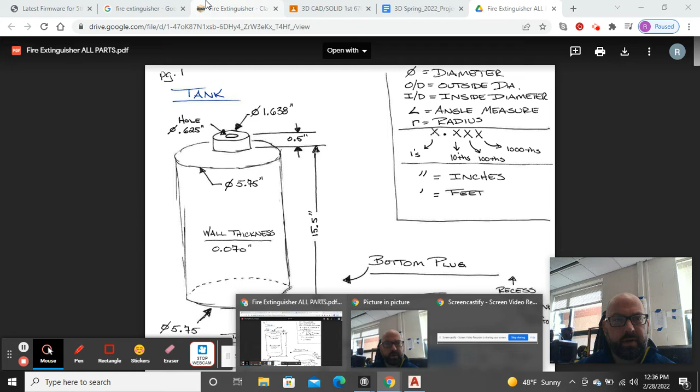Hello, this is going to be the first video of a multi-video series on modeling a 3D fire extinguisher. And the reason that this is getting modeled is it's just something that's in my room and in my classes.

For some reason, 9 has become the magic number, and anything that the kids are part modeling, and like trying to work to improve new 3D skills or whatever, I always say there's got to be a minimum of 9 unique parts. And sometimes I'll have students do 40, but that really prevents getting too few parts where there's just not enough rigor for the project.

So, in later videos, I will share a photo of the one that I'm drawing, so you can see some clearer pictures. But this is basically it. And the part that I'll draw first is going to be this tank, and where I'm pointing at with my little mouse hand right here is this curved portion of the tank.

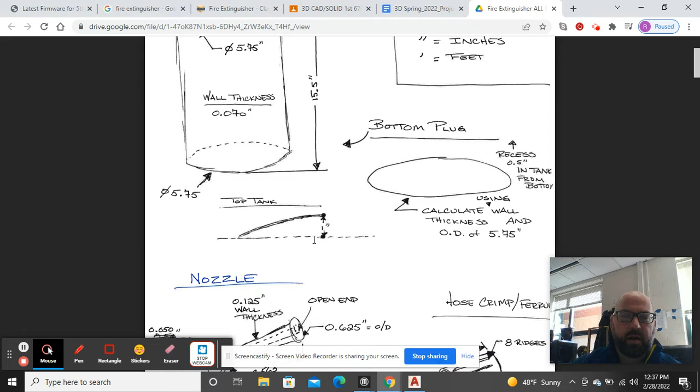And so on this project, I've created a whole series of drawings for the students, and they look like this. Part of this is so students can apply. I will have students do it on their own from time to time, but this is so that they can apply use of multi-views and perspective drawings, and measurement, dimensioning, those types of things.

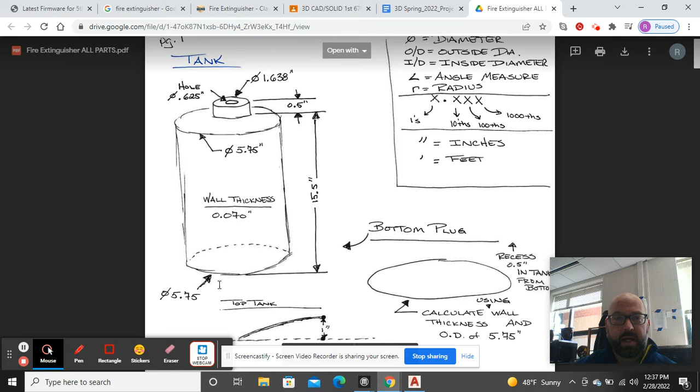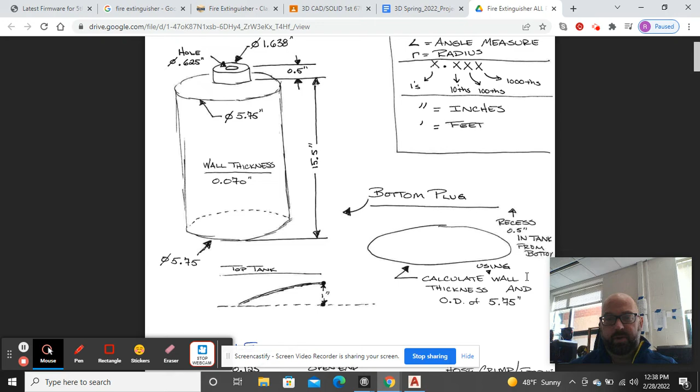Okay. So what I'm going to do is I'm going to snip a part of this right here and use this information to draw the tank. I might make the tank into 2 videos, but the first part of it's very easy, and it's just a cylinder. Okay. Where's my zoom? I like to zoom out of this a little bit, but so I'm going to go Windows button Shift letter S to snip this, and I'm going to go ahead and pop this in my AutoCAD drawing,

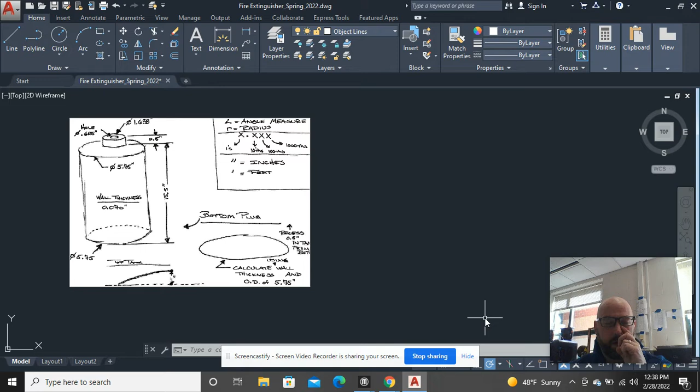and that'll be my starting point. I only put these so that it's real easy to do this if you're working in a 2-dimensional space, and I can do the bulk of this in 2 dimensions. Okay, for my students, I keep telling them, the higher percentage of things you can do in 2 dimensions, the quicker your 3-dimensional work is.

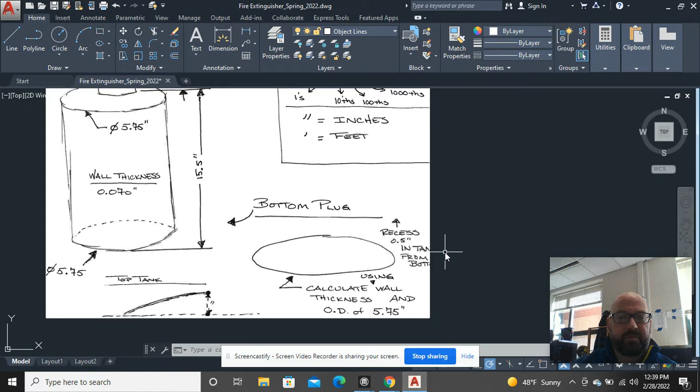Okay. So if I look at this, I see that I have a tank and it's got a diameter of 5.75, and then the wall thickness, or the thickness of the steel that this is actually made from, is 0.070 inches. This part, you might wonder, what is a bottom plug? It's just a plate. It's got the same thickness. And it says that it's recessed a 1/2 inch into the bottom of the tank.

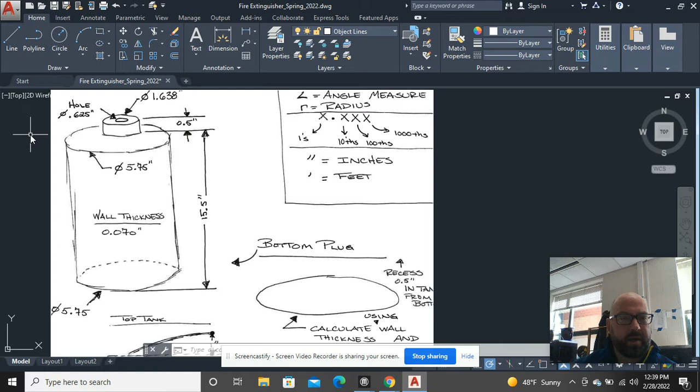Another thing to look at and note right here, if I look from the very bottom of the tank all the way up to the base of what I would call the neck, I know it's hard to see my mouse, but where that little spout is, it says over here it's 15.5 inches.

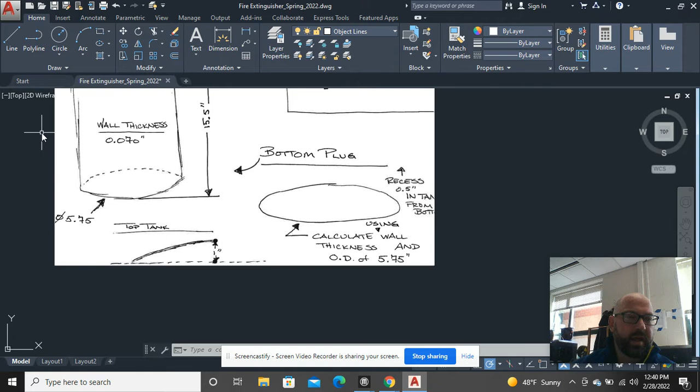Okay, but when I come down here, I showed a portion that's right above my mouse here, where it's showing a curve, and to get that dome-shaped portion, the height of that curve is 1 inch off of an imaginary baseline. So that measurement of 15.5 inches will actually get shorter. Okay, so what I'm going to do is start with a circle with the diameter of the tank.

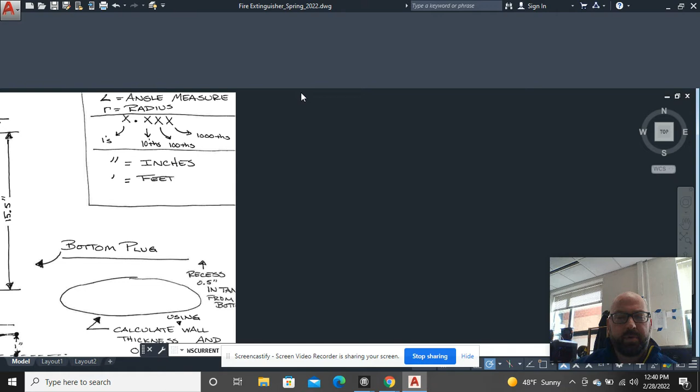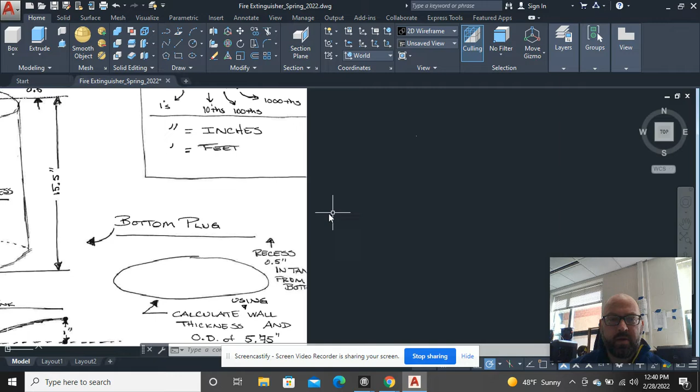If you haven't been in AutoCAD in a while, my ribbon is set up for 2 dimensions right now. So I'm going to go ahead and change it to a 3D modeling ribbon down here with the little settings wheel. And I'm going to start by just drawing a circle with a diameter of 5.75 inches. And who knows, where did that circle go? Is it here? Yep, that's it.

So this image that I brought in was way too big. So I'm going to go ahead and move this over to here. Get this a little bit closer. Still very large.

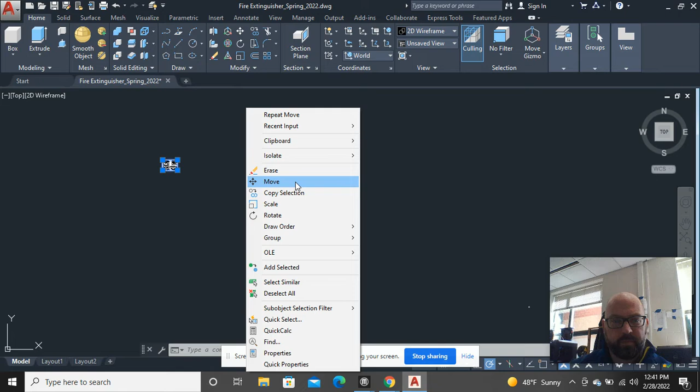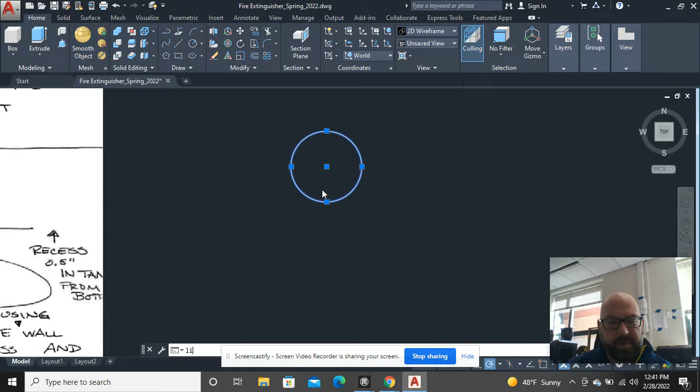Sorry about this. I should have double checked it. Still going to shrink this down quite a bit. There we go. That's a little bit better. Okay. And I'm just going to check this. LI spacebar is my shortcut for list. And for some reason that says, what is the diameter? Gives me a radius 2 7/8. So that is my circle.

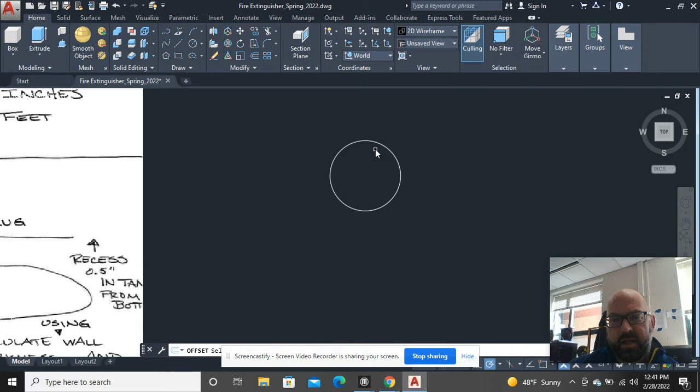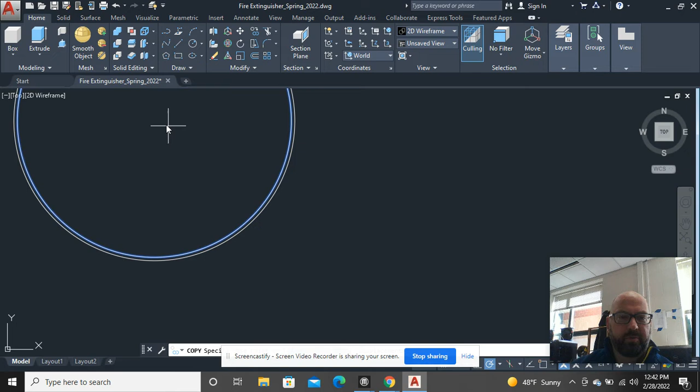Okay. Coming back here, I look at wall thickness and it says 0.070. So if I offset this 0.070 to the inside, click the outside of the tank, use the offset tool, type in 0.070. Now you can see I have a circle within a circle. And I'm still going to go ahead and make that a little smaller. That now can be used, I can steal this inner circle and use it for the plug or the metal plate that would be welded on the inside of the tank.

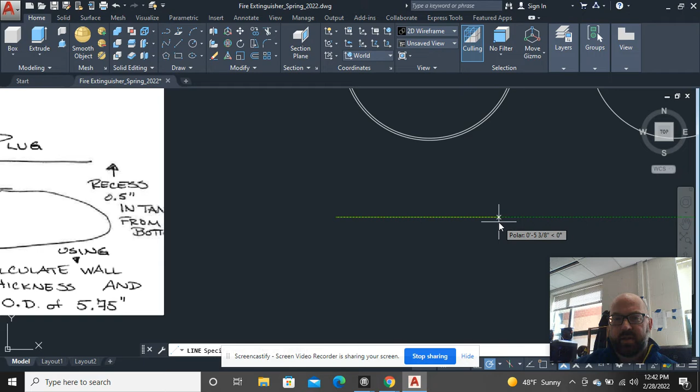Okay. The next thing I'm going to do is, while I'm here in a top view, I'm going to set myself up for drawing the top of the tank. And so the way I'm going to do that is I'm going to use a construction line. And I'm going to draw a horizontal line that is the same length as the outside diameter of the tank, which was 5.75.

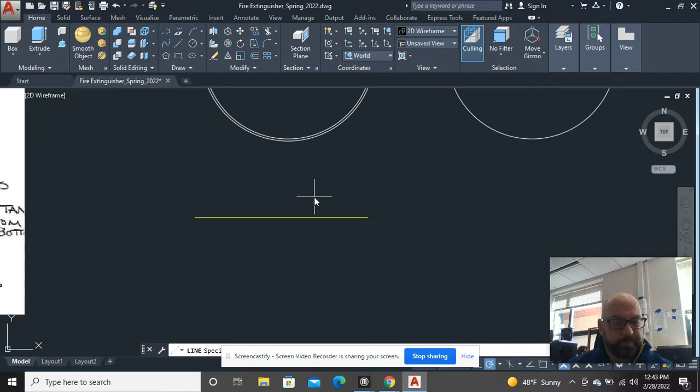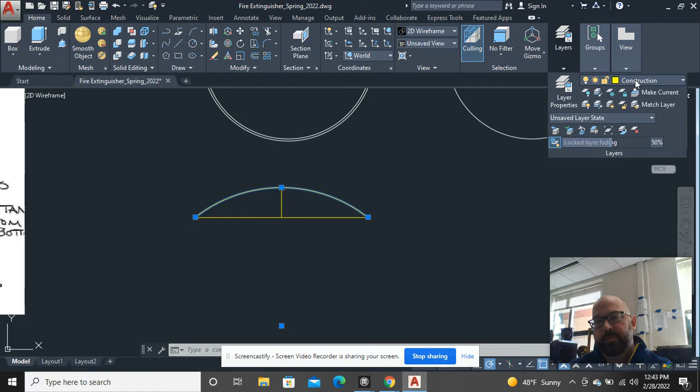Since I showed that the curvature from this imaginary dotted line to the very highest point of the tank was 1 inch, I can, apparently my object snaps are not on, I can just draw a vertical line 1 inch. At this point now I can just use an arc and click from there to there to there. That's not a part of the object, so I'm going to put that back on object lines or whatever I had drawn that on. There we go, object lines. Oops.

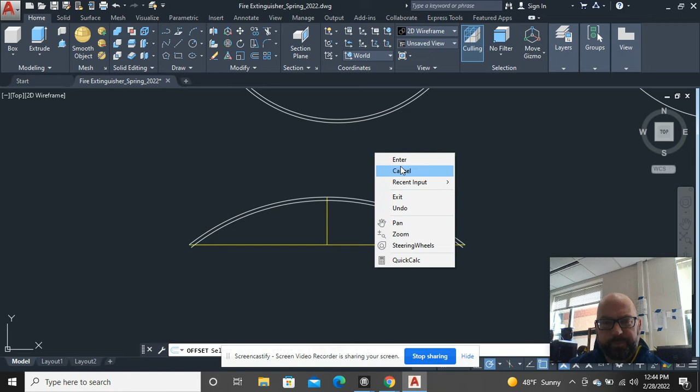There we go. And likewise, I'm going to offset this 0.70 inches. Oops, must have been 0.070. Offset 0.070. Excuse me. And there I go. Okay. I have to trim where this is overhanging. And then I'm going to also trim this entire right side. I don't need that at all. Okay.

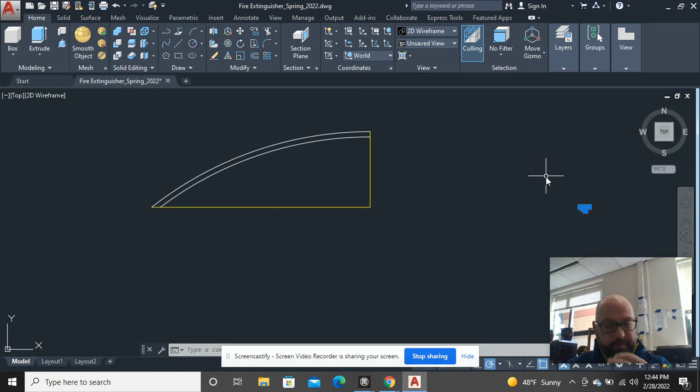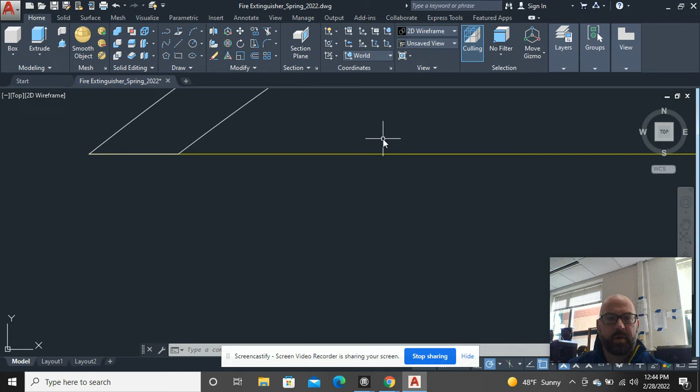At this point, I can draw a line from here. Oops, got to be on my other layer. Layers, object lines. I can draw a line from here to here. And then come in and draw one from here to here. Okay. This baseline is no longer necessary, but I am going to keep this line because it's handy for placement when I get down the road.

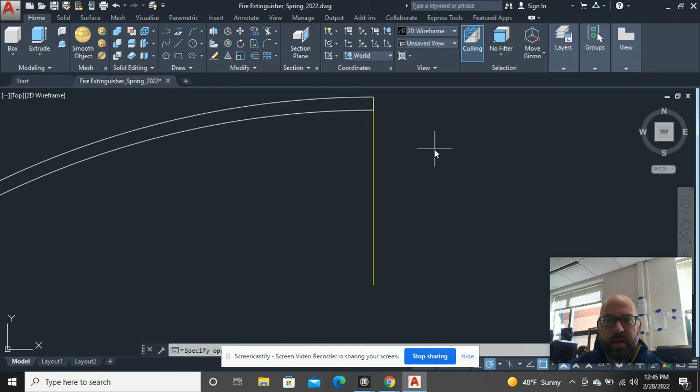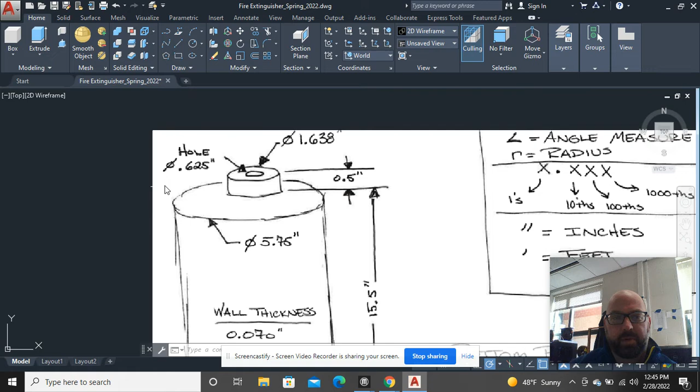The last thing I want to do in 2 dimensions here is join all of that stuff. Okay. And I am going to nudge my little stick, remembering that it was connected up to the very tippy top of this. So I'm going to nudge the stick because what I'm going to do in 3 dimensions now is revolve this. I suppose it's not a bad idea while I'm here in 2 dimensions to draw the neck on the bottle. Actually, I think I'll come back to that later on. So I'm going to delete this for right now.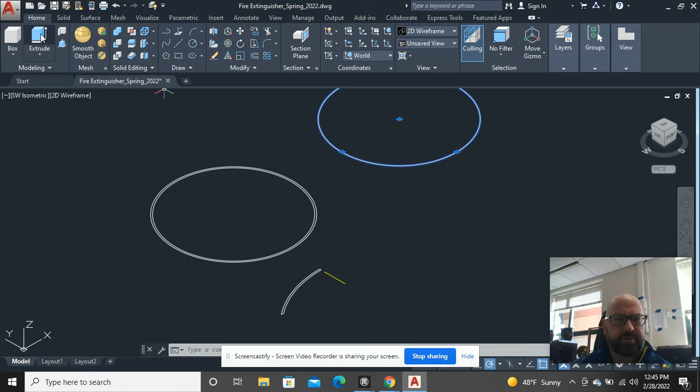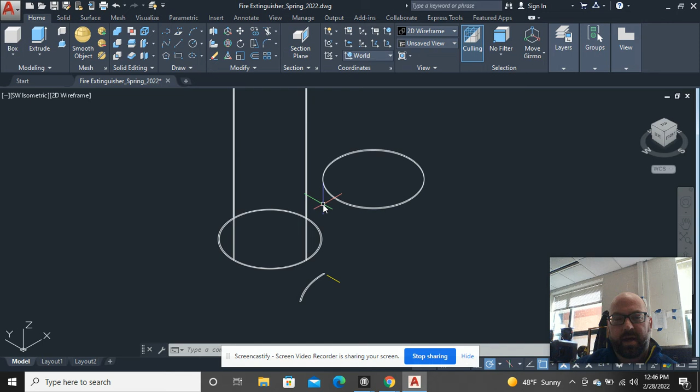And now I can go up to a southwest isometric view and get all my parts and pieces put together. So what I'm going to do is extrude this. And I want to make that extrusion 0.070. And that's the plug now, or the piece of plate that will be inserted into this tank. Okay. I want to make the height of this 14.5. And the reason for that was 15.5 was the distance all the way up to the top of what's going to be the curved portion.

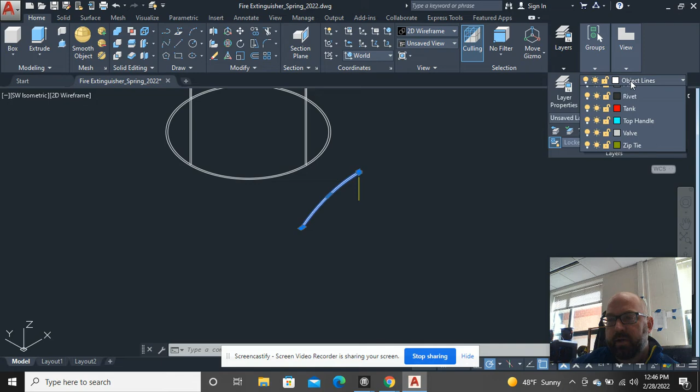Okay. I'm going to 3D rotate this part. 3D rotate, pick a base point. I'm going to go around the red ring or hoop, and I'm going to type in 90 degrees. Now I have this ready to roll. Okay. I've pre-done some layers which are on my website. And so what I'm going to do is put these on the appropriate layers.

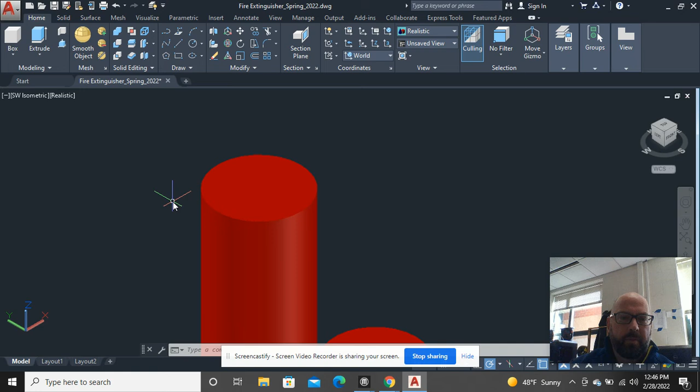Okay, and I'm going to start. So these are all solids now, at least two of them are. That's a solid and that's a solid. I want to subtract the inside of this out, so I'm going to go ahead and go subtract.

Pick the outside, right click, hover in, and I've got to get it till just the inside lights up, just that inner portion, which is sometimes difficult. I can't see that it did subtract it. So if you have difficulty with it, change from realistic to a 2D wireframe, and then go back to subtract.

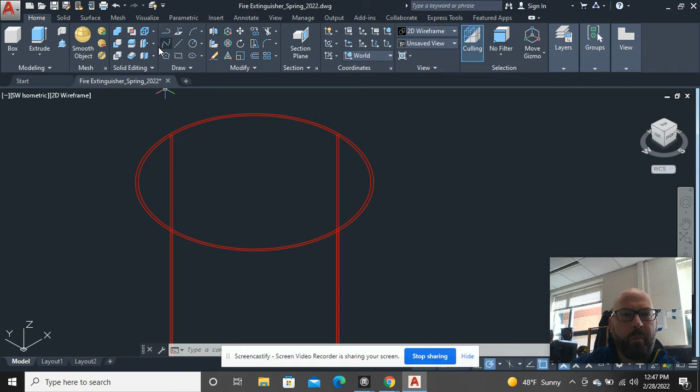Pick the outside. Always pick the bigger first, then right click, then pick the smaller, then right click again. It won't look as if anything has subtracted at all, at least when you're in realistic, okay?

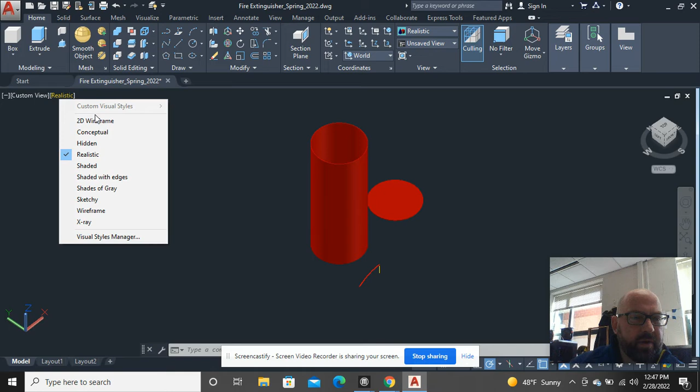In this case, I'm going to go back to a 2D wireframe, and I'm going to move my object from the very bottom center mark. Sometimes to get these center marks to light up, you have to get in towards the center, then pull out, and then come back again, okay?

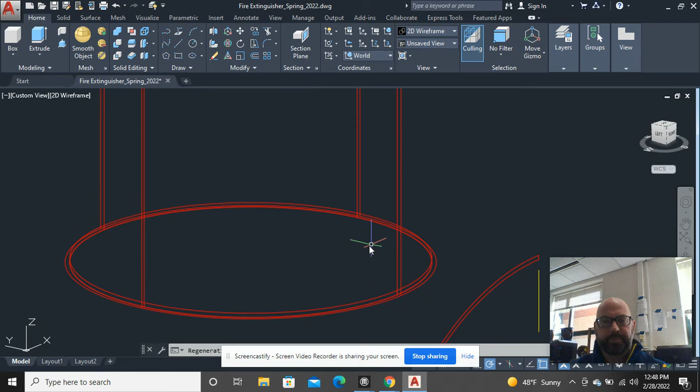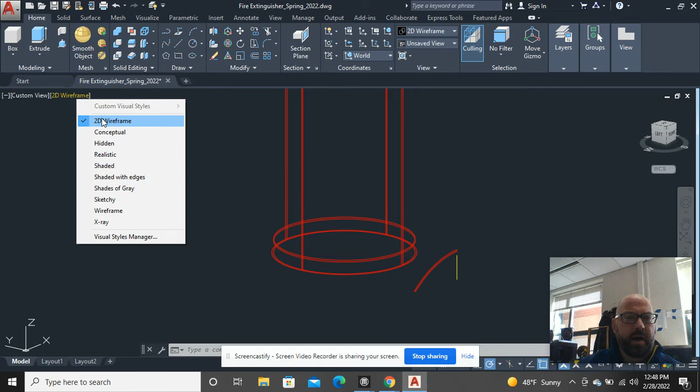Now I have to find what was the ring, or I'm sorry, not the ring, the plate or the plug. I found it, highlighted it, and I'm moving it from its bottom center mark, and I'm going to go up, following the green dashed polar line, and I'm going to type in 0.5. And at this point now, I have a tank that has a bottom in it, and you can see right here, that bottom is recessed 0.5 inches.

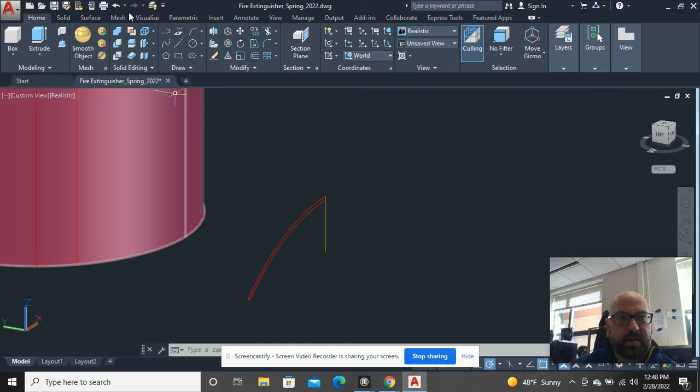Some students in my class are doing this with different software. You could do it with Fusion, you could do it with Inventor, you could do it with just about anything, okay? The last thing I did right there, I'll just go back. I remembered that I want to replace this when I'm all said and done back up here, okay? But I forgot I need to leave it alone for right now.

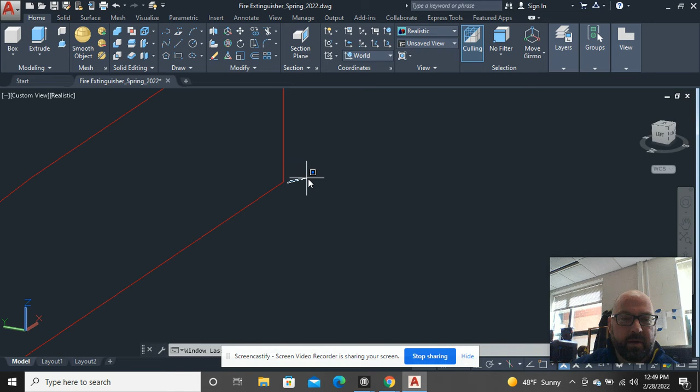So this will only work if this is joined. When I hover over this, everything is joined. If there's any types of overhangs, like if, for instance, this bottom line went a little bit past or something else, it will not work, okay? So under the extrude, I have revolve. I'm going to come down and select the object.

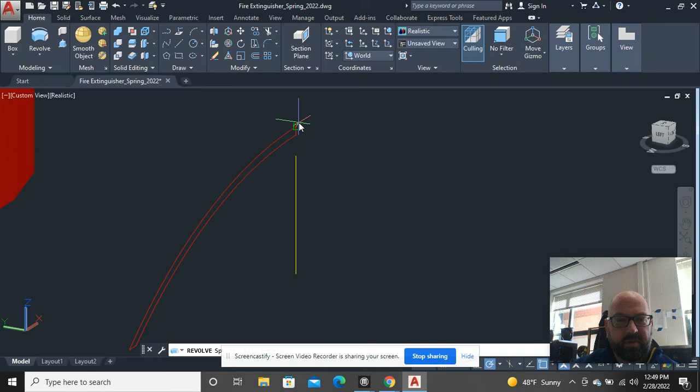Revolve is like spinning something around on a hub, like spinning a wheel on a hub. It's asking me for an axis, so it wants 2 points on an axis. And as you see, I can cruise around, and it'll allow me to revolve to any point I want to. So in this case, I would type in 360, and that gives me 360 degrees of revolution.

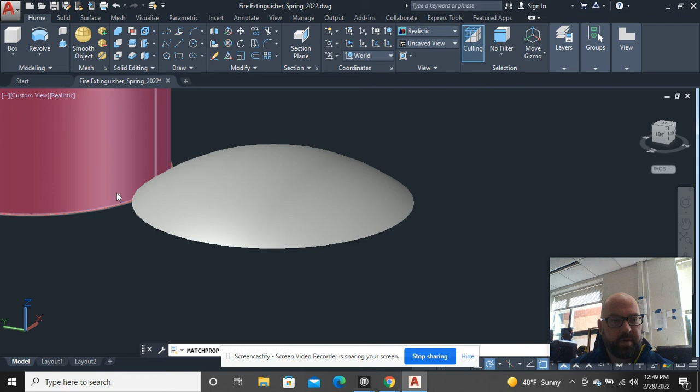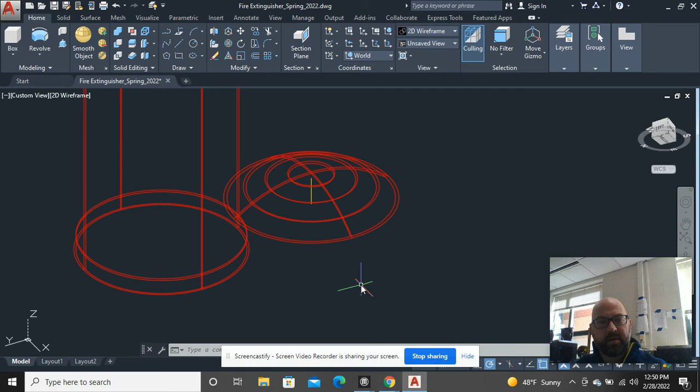And I'm going to go quickly back to here. The most difficult part would typically be placing it. That's why I left my stick on the entire time, because it allowed me to, and now I'm having a hard time getting it back. So in order to hopefully make this a little easier on myself, I think I'm going to draw a construction line, because that stick would really make it handy.

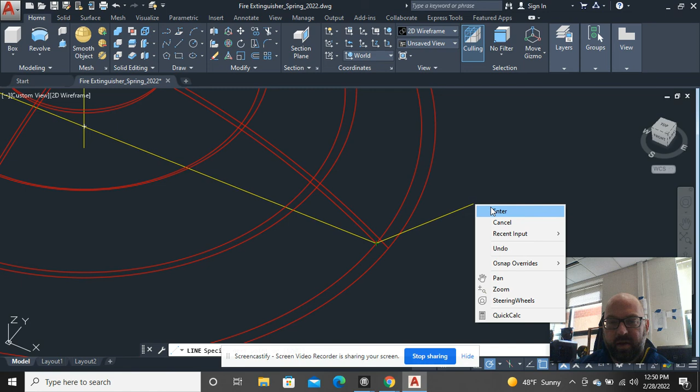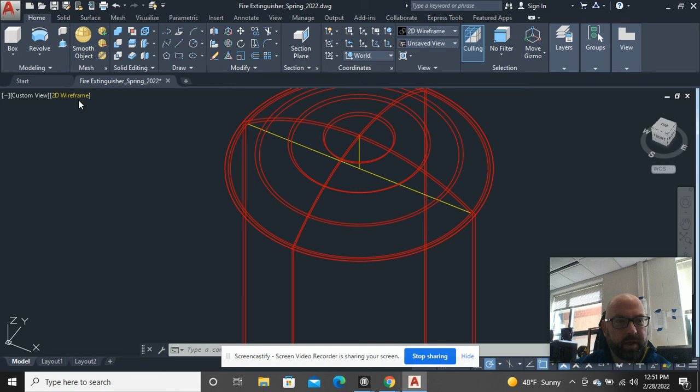If I were to go from that quadrant to the same quadrant on the inside, now I can move this object from its endpoint to the midpoint of the construction line. I could get rid of that whole thing. At this point, I could just grab it by the stick. But if I come up towards the top, I have an endpoint right there. Smack it on and go to a realistic. And now I have a very realistic looking top of my tank.

That is the end of video 1. Video 2, I'll come back and make the neck for the bottle, and then I'll come back and start with other pieces and parts.